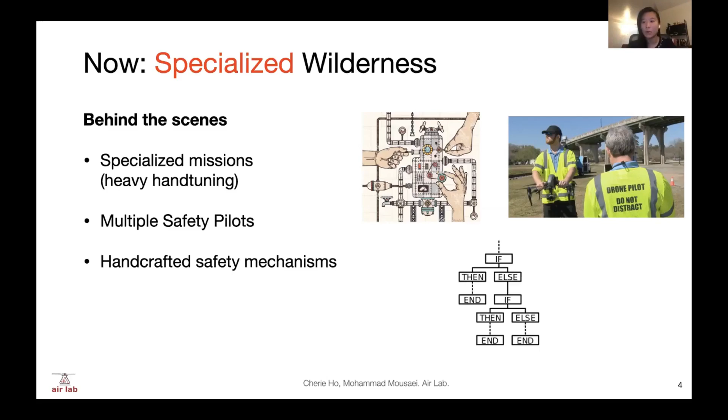So how do we get from here to our vision of ubiquitous autonomy? What we mean here is we envision a world where autonomy is seamlessly integrated into our lives at scale. And in order to allow for that, we first need to address the generalizability of our algorithms and rely less on the hand tuning that is needed, be able to handle out of norm cases and be self-accountable. So being able to handle these out of norm cases without necessitating the safety pilots.

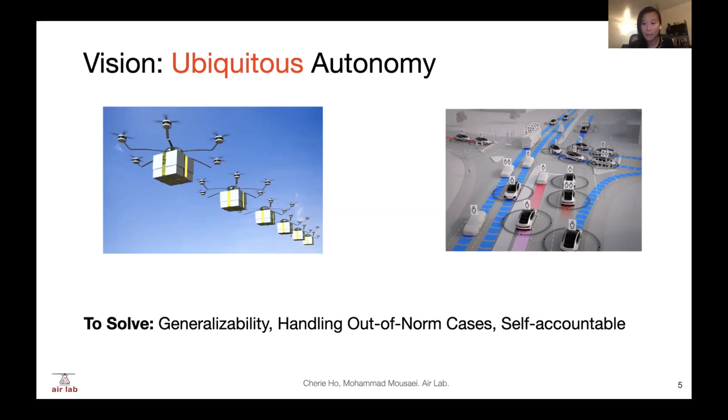So graphically, looking at the timeline and the level of risk, beforehand we were at very controlled environments, indoor environments, cages, where we're able to begin our robotics algorithms. And now we have a lot of success in bringing these caged algorithms out into the wild. However, this requires a lot of hand tuning and handcrafted safety mechanisms in order to enable safety for those specialized cases. Looking forward, we hope to go towards ubiquitous autonomy, where there's a lot higher risk due to the large number of cases that the system might interact with.

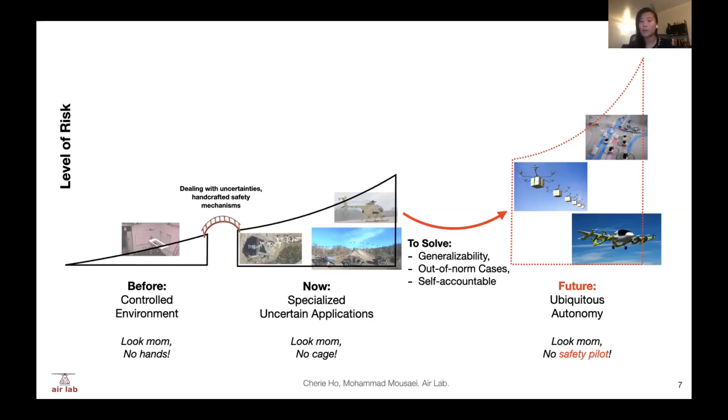And so really, to bridge this gap, we need to solve the generalizability issue, handling out of norm cases while being self-accountable. So to encapsulate, our key question is how can we ensure safety or guarantee safety for scalable deployment in the real world? What we mean by ensure safety is almost like ensuring there's a bound on risk, being the likelihood of a very bad, unrecoverable event, and bounding that in order for us to be able to have scalable autonomy.

So now we're going to talk about the challenges that ensuring safety has in current methods. We're going to look at a familiar running example that Basti introduced in his slides, which is the autonomous helicopter example. Here, we're going to add different agents, which are our dynamic obstacles. The helicopter has nonlinear dynamics, and it can experience different disturbances, like, for example, wind disturbance. And the goal here is to reach the goal point safely and without any collision.

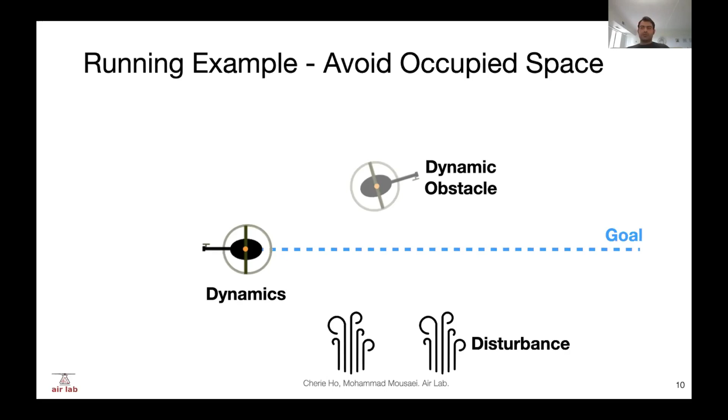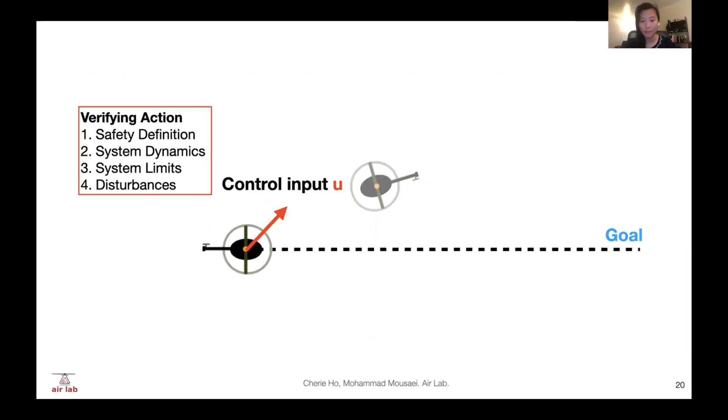So given an action can be a control input to the system or a trajectory to follow. If all cases are safe based on this definition, all cases being the bottom 3 blocks, then this action is verified as being safe. So to be more concrete about that, we go back into our running example. For example, an action can be a control input, or for now, we'll talk about a trajectory.

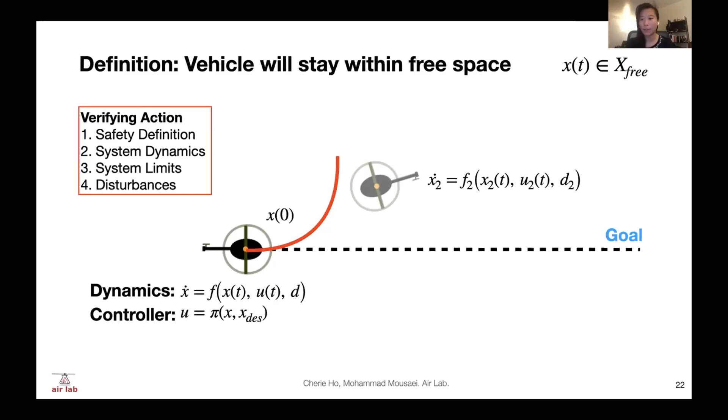We first define a safety definition. So a vehicle will stay within free space. We define the system dynamics, which includes the dynamics in the controller, and for the multi-agent case, maybe our knowledge of the other dynamics. And then we also have system limits, which goes under the controller on what the constraints are. And then finally, we have a disturbance, and this is often in the form of bounded disturbances.

I'll just wait right now if there's any questions from this slide and the slides before.

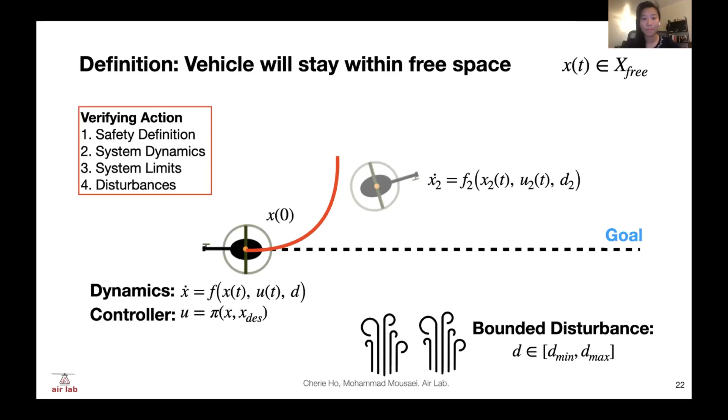Okay, so continuing on, we'll introduce 2 key tools, one being reachable sets and the second being control barrier functions. So the key idea of a reachable set is, here we focus on verifying that a trajectory will be safe. We'll be computing the set of all possible states when following the trajectory. We verify that an action or the trajectory is safe by ensuring that the obstacles are outside of this reachable set.

So mathematically, we can formulate this as a reachable set for a given time interval that it takes to follow a trajectory. And then this is a union of all the reachable sets at the different times while following. And then specifically, in the colored section, we can see how it's actually defined, where we look at all possible states given a model dynamics following our given possible initial states, the input, which comes from the controller and its constraints, and then the disturbance. From here, you can see how our assumptions on the model, the initial states, the input space, and the disturbance are vital to a safety guarantee.

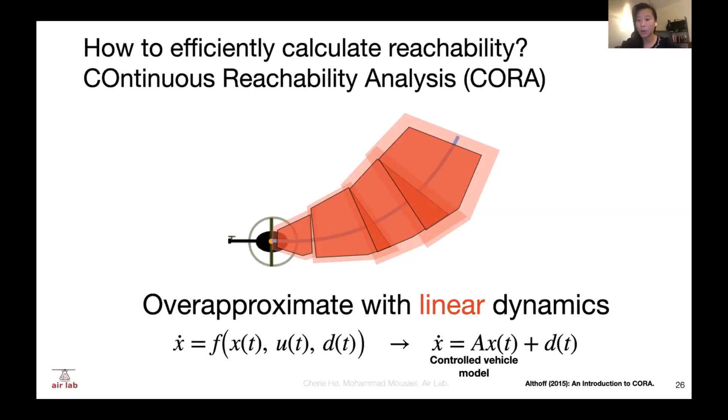So the key idea is we have a helicopter that has a nonlinear dynamic. The key idea is to first find the reachable set given a linear dynamics, and then over-approximate given the possible linearization errors. So mathematically, how the model has changed. First, to the left bottom here, we have x dot = f(x, u, d). That can be a nonlinear dynamics. They concatenate the controller and the vehicle dynamics into one, which is described by A, and then plus the disturbances and the noise as a separate d(t).

So building an intuition on why we should start with an LTI system. Here again, we have our model Ax plus d(t). The key property that we leverage is superposition, which allows us to separate the homogeneous and the inhomogeneous solution. What this means is the solution, being where this robot can be at time T, can be separated from where the robot can be given the disturbances. And because these are not intertwined, that makes the computation more efficient.

It's also helpful that LTI systems are a very popular system that we analyze across different engineering and physics disciplines. And so there are many well-known solutions we can use in order to aid in our solution finding.

So an overview of how we can calculate these reachable sets. First, I'll talk about how to calculate it for a linear system. Then we'll talk about the modifications needed to analyze a nonlinear system for our helicopter.

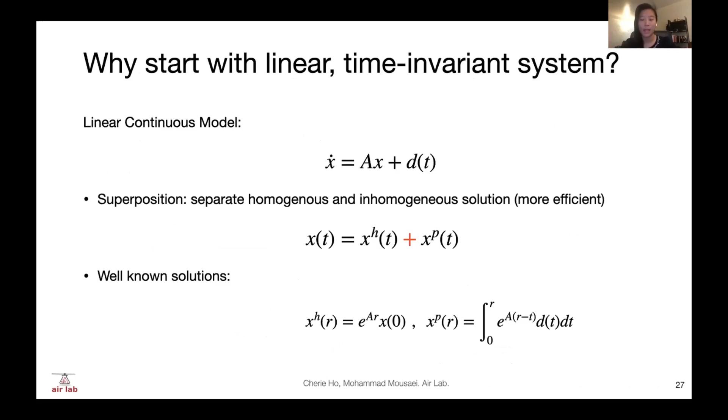However, just doing this convex hull is only a reachable set if the robot travels straight and has no uncertainties, uncertainties being disturbances or sensor noises. So in order to find the final reachable set for the interval, we enlarge the reachable set to account for the curved trajectory and the uncertain inputs.

So extending to nonlinear systems, once again, the key idea is to linearize the nonlinear dynamics, then over-approximate by the linearization error. We do this in order to enable efficient computation. Then we over-approximate by a bound that we can derive from the differential equation of the linearization error.

And then finally, for a highly nonlinear system, the linearization error can be extremely large. So we attempt to constrain it by defining a hand-tuned heuristic, which is the maximum allowed linearization error, such that if a set with linearization error bounds is larger than that, we actually split the reachable set and redo that calculation to be more accurate. Of course, this is a balance between how accurate we want to be and the compute time, as these loops would take multiples of time.

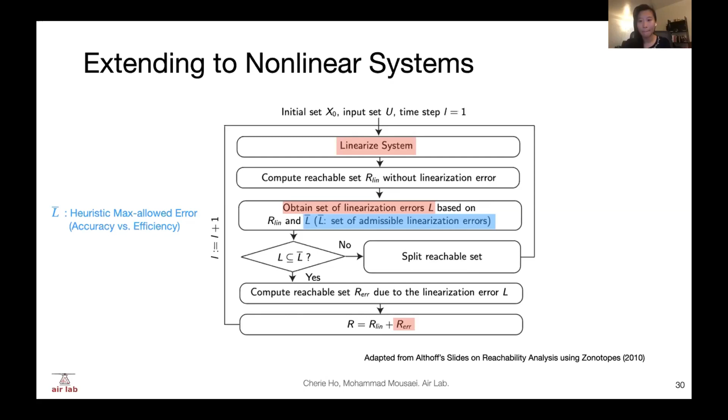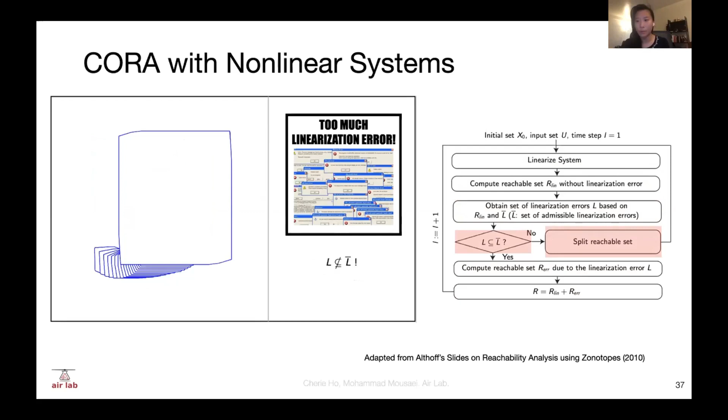However, in the very nonlinear cases where there's too much linearization error, in order to be more accurate, we split the reachable set. A note: in Althoff's paper where he applied this technique to the autonomous driving case, if a trajectory is outside of the maximum linearization error, he chooses to cast this trajectory as unsafe, as doing the splitting can lead to non-deterministic computation time, which is detrimental for our real-time constraints.

An extension of this work, also by Matthias Althoff, is on stochastic reachability analysis, which he also applied to the autonomous driving case, which may make more sense as it is highly uncertain where other agents may go. So he has done some work on how to account for the stochasticity.

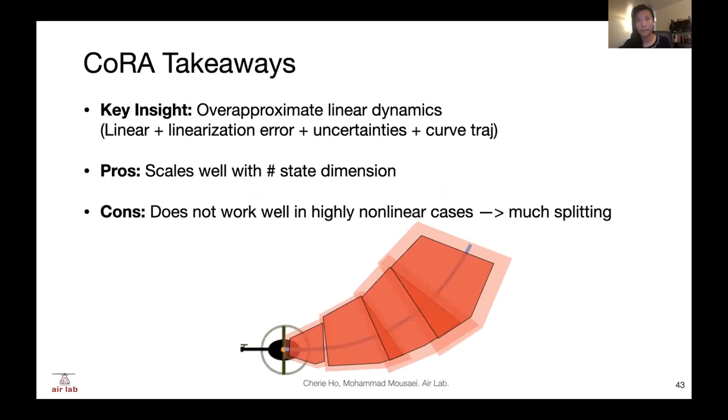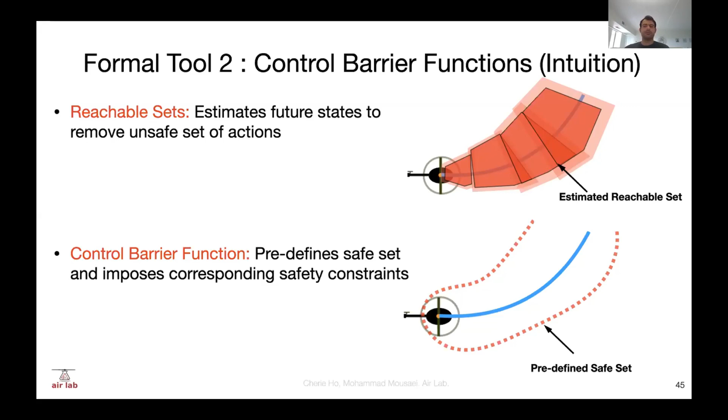So as we talked about, a control barrier function tries to predefine a safe set. And here we go a little bit deeper into how it's actually done mathematically. Here we assume control affine form, but in terms of the dynamics themselves, in the general form of control barrier function, we don't really assume anything. So we can plug in any nonlinear and complex dynamics here and still go through the same definition of safe set.

For the safe set itself, the safe set is the set C, which incorporates all safe states. The way that we define the safe set is that we first define the function h, which maps from n-dimensional state space into one value, which basically compresses the notion of safety, in the way that we define that whenever h is positive, we are in the safe set. So h being positive means that we are safe.

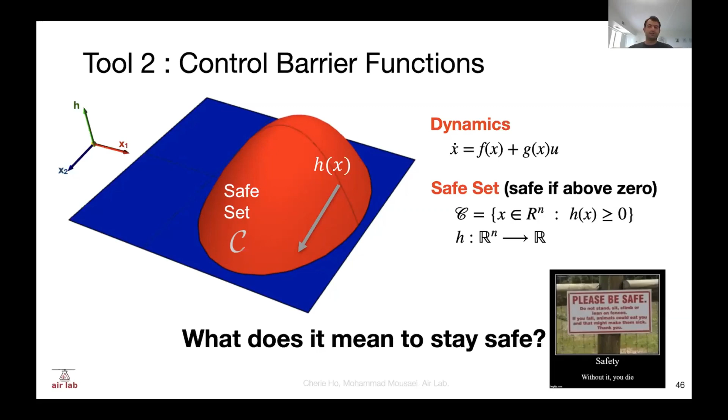So to show that visually, in the simple example of a two-dimensional state space, we can plot all the h values, and we can see the plot on the left. As you can see, the blue plane is basically our two-dimensional state space at h equals 0. Anything above this plane would construct our safe set, which is shown as the red bowl-shaped surface. So being safe basically means our system keeps being inside that bowl and doesn't go outside it.

Now that we have the notion of our safe set, how can we check for safety? For example, if we want to take an action, how can we check that that action is actually safe? You can assume that if we don't have any control input, which means u equals 0, we are confined on the surface of the safe set. So assume that we are at some point on the surface, we want to take some action, and we want to ensure that that action is safe.

One thing we can do is require the derivative of h to be greater than or equal to 0, which means we can only go further inside the bowl or stay at the same level of h, which basically ensures our safety. That is the notion of the Nagumo theorem, which says the derivative of h should always be greater than or equal to 0 on the surface of the safe set if we don't have any control input. So to make it more general, as an extension, we have the control barrier function, which allows our control input to be non-zero.

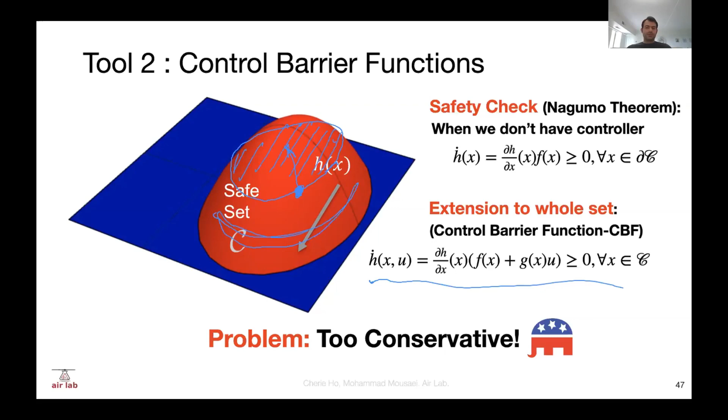One problem with this notion of control barrier function is that it's too conservative, which means that looking back to this point that we are in right now, if we want to abide by this constraint, the only area that is left for us to stay in is this top area. And we are losing this whole part, which is still perfectly safe, but we are not using it. So this notion of control barrier function is too conservative.

As a solution to being too conservative, we can allow our derivative to go negative. But we should be careful with that, because if our derivative goes too negative, we can go outside the bowl and we are no longer safe. So one way we can do it is through this equation 1 here, which basically allows our derivative to go negative.

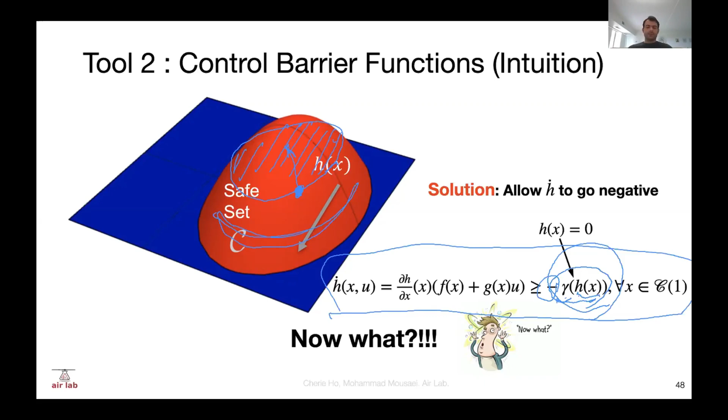So with this notion of safety, we can guarantee that we are always inside the safe set, and we can use the whole volume, but we can never go outside. So now that we have a mathematical framework to define safety, what can we do with that?

So what we can do with that mathematical framework of safety is that we can define a safety filter which lies between the controller and our system. And it basically filters the output of the controller. So the controller comes up with a desired control input, and this safety filter forms an optimization problem, which you can see here, that optimizes our control input to abide by the safety restrictions, but be the closest control input that can be to our desired control input.

So if our U desired is already in the safe set, this optimization problem just outputs the U desired itself. But if U desired is not in the safe set, it'll change it, and it outputs the closest U to U desired that is still in the safe set.

So this whole safety filter is computationally efficient because the cool thing about it is that our constraint is in affine form, and our objective is quadratic, which forms a quadratic program which can be efficiently solved through so many QP solvers that are out there.

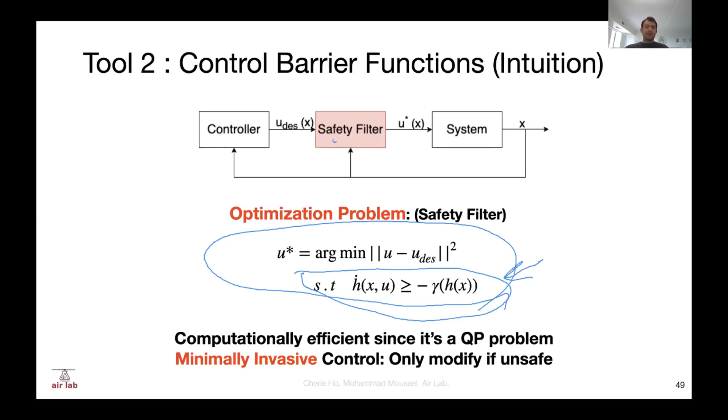And another good thing about it is that it is minimally invasive, which means that it only kicks in when the controller is outputting unsafe control input. Other than that, it just passes the same thing through.

Now that we have our optimization problem, we will talk about a specific example of how that safe set is being constructed, basically. So here we assume double integrator for our dynamics. And for defining our safe set, we basically need our velocity-based distance between two robots to be greater than a safety distance. More specifically, we want their distance plus the distance that they would travel in a certain time to be greater than a safety distance.

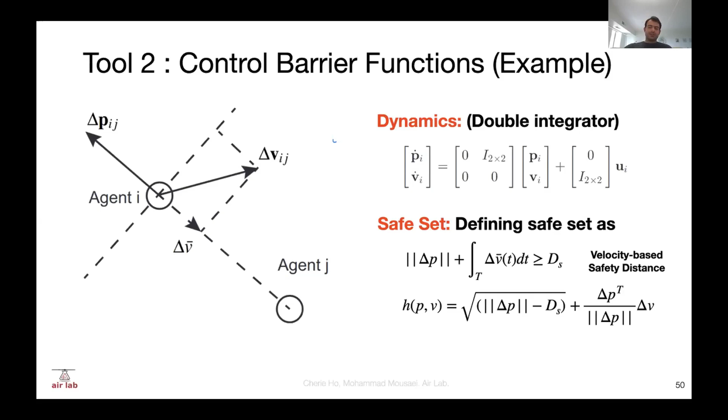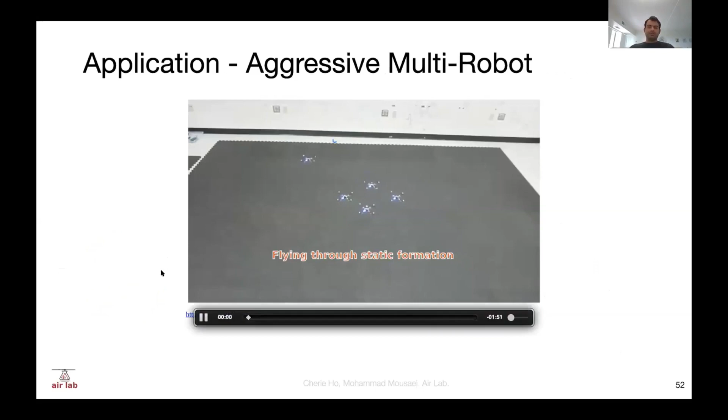So the best way to show the result of control barrier function is through aggressive multi-robot application. And you can see here that the 4 robots in the middle, their controller is trying to either hold a position in hovering mode or go in a circular motion, which you will see later. And the other robot is trying to go through them, basically. And once they are in collision course, control barrier function kicks in and changes the control input for the robots to stay safe.

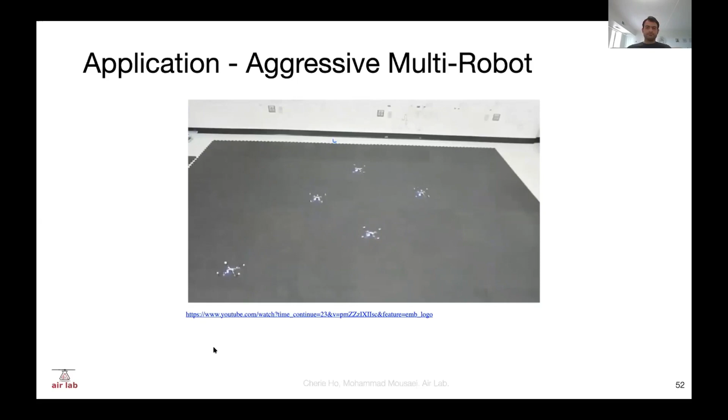So the main takeaways from control barrier functions: the key insight is that a control barrier function predefines the safe set and tries to always stay in the safe set, assuming that all the assumptions still hold. And implementing control barrier functions is minimally invasive, which means that it only modifies the nominal control if it's

absolutely necessary. The good thing about control barrier functions is that they are used to verify safety properties of a set without going through the difficult and computationally expensive task of computing the reachable sets, which Cherie talked about. So it's computationally more affordable.

But the disadvantage of control barrier functions is that they basically don't really work when our assumptions are violated. And they can get stuck in a deadlock situation when the system is completely symmetrical. Also, this is not exactly a disadvantage, but it makes control barrier functions a little bit case specific: for any application, we need to design our custom safe set, and it reduces the modularity of it, kind of.

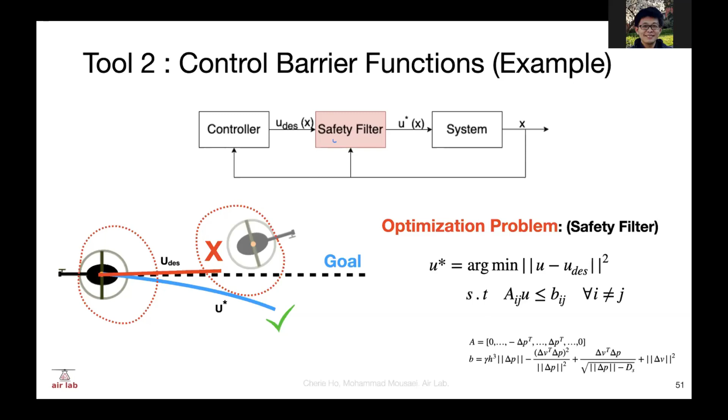Okay, thank you. Any other questions? Okay, so back to Cherie.

All right, thanks, Mohammad. So just now we talked about the mathematical formulations needed to verify an action, either a trajectory or a control input that Mohammad talked about. Let's see what some challenges are where this might fail, and we'll also talk about one key way people are beginning to address this. So back to our key figure, where we're going from specialized cases into ubiquitous autonomy, the real world, where we don't really know the potential cases our system can face. So at this point, are our current tools sufficient?

So comparing the common model and the real world, going back to our key ingredients like dynamics and disturbance, these are just a few examples, we can see deviations between our common abstracted model and the real world. For example, in vehicle dynamics, we generally abstract it as an integrator model, often second order, which means it's an acceleration-based model. However, in the real world, these can be highly nonlinear with a lot of dynamic constraints.

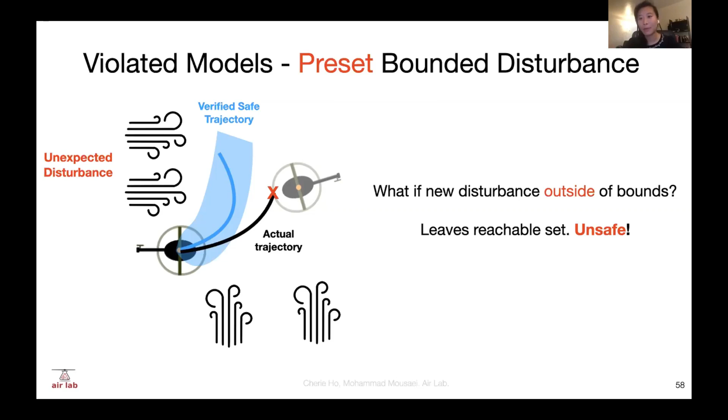not in collision. However, suddenly we actually experience disturbance outside of the bound, so we have 2 more winds coming from the left side. This can cause the actual trajectory that the helicopter experiences to leave the previously verified reachable set, and therefore it's actually unsafe. So here, our model assumption is violated when the disturbance is outside of the assumption.

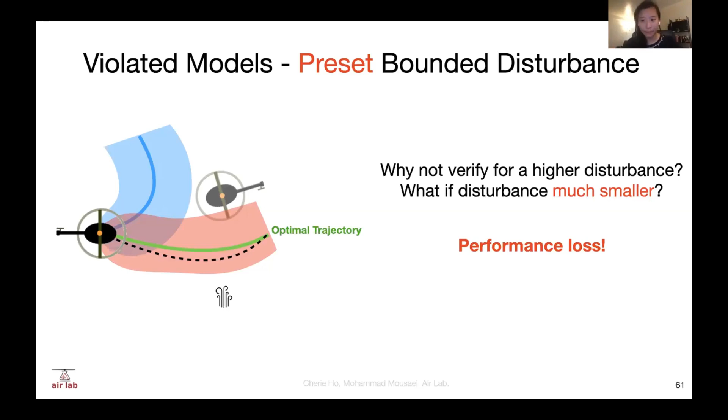So one option that people are starting to look at is adapting this kind of safety verification online based on the current estimation. One way that we have proposed doing this is pre-computing these reachable sets at multiple disturbances, basically at multiple disturbance models. And then online, using the disturbance information to adapt our margins on the fly. So going back to the running example, how this can be used. We also do this in a trajectory library framework.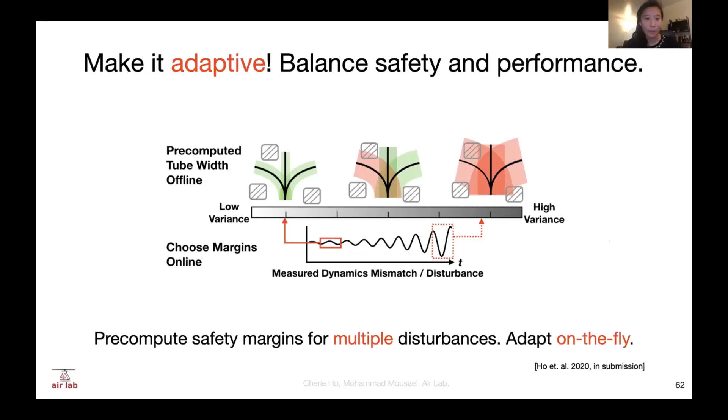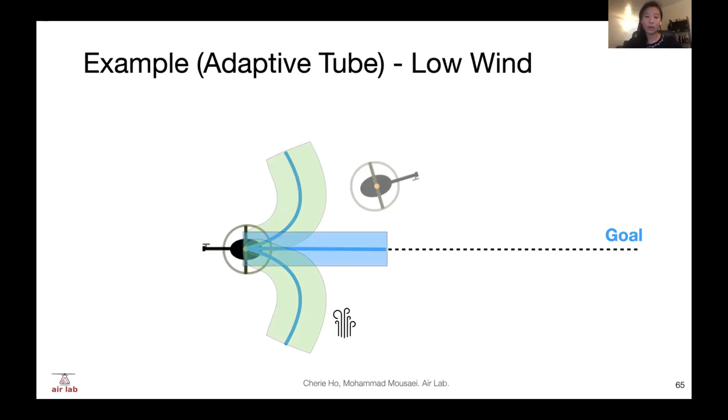Here, again, with our running example, we have 3 trajectories that we can choose from. It senses that it's at low wind and uses the smaller reachable sets. And all of these are verified safe. And we finally choose the straight line path, which goes straight to the goal. And at high wind, the original trajectory that we chose in the low wind condition is in collision, and we choose one of the left or the right turn. So here we adapt in order to better balance safety and performance while giving safety guarantees.

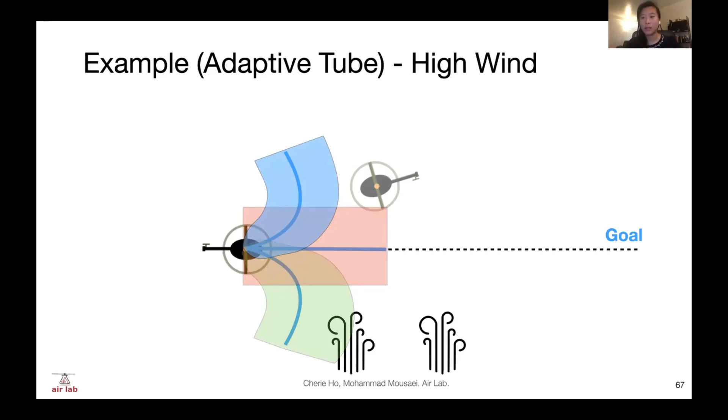So in summary, we talked about why ensuring safety is important. The underlying challenge is safety versus performance, which is exacerbated by the increasing complexity of our algorithms and the number of tail-end cases in more and more applications that we're going into. We also talked about 2 key formal verification tools: reachability analysis, which, as Mohammad says, estimates the possible states that a system can be in given a certain action, whilst with the control barrier function, we predefine what the dynamics should look like in order to give a guarantee on where the barriers of the system are. And we talked about how this may fail when the model is deviated and potential methods to alleviate this challenge.

Some of the open questions and trends: how do we know how well we have covered these cases for complex systems? As Mohammad talked about just now, these complex systems may now have neural networks, a lot of learning-based systems, where it's very unclear how we can actually test for coverage. Second, how can we still stay safe even when our previous assumptions are violated? One potential way we talked about is having multiple assumptions and then adapting which assumption to choose in order to get that verification.

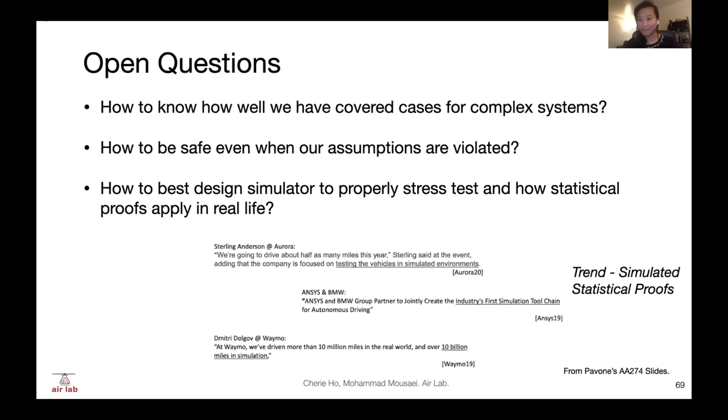Cool. So we'll go on to our interactive session that Mohammad will lead. In the interactive session, we're gonna go through control barrier functions that we just introduced. You're gonna implement that safety filter, which lies between the controller and our system itself. So the way you do it is that you are provided with the nominal U, and you are trying to construct that optimization problem that comes up with the U star.

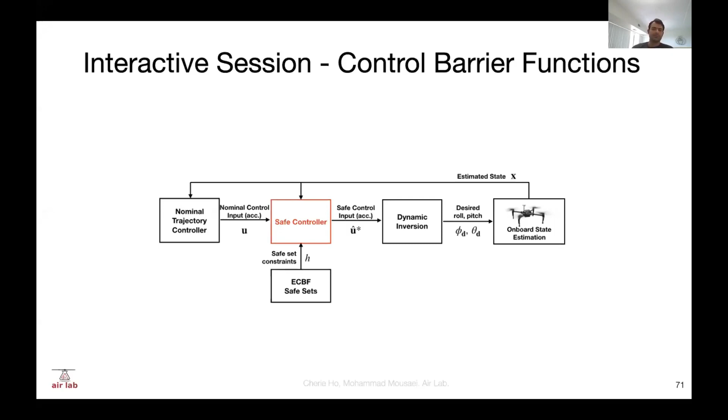So what you want to do is to fill out the compute safe control function in ecbf_control.py to implement the control barrier function optimization problem that we introduced today. A and B is actually already in the code, but you can use compute A and compute B functions to derive the constraint, and then you want to construct the optimization problem. And can we go to the next slide?

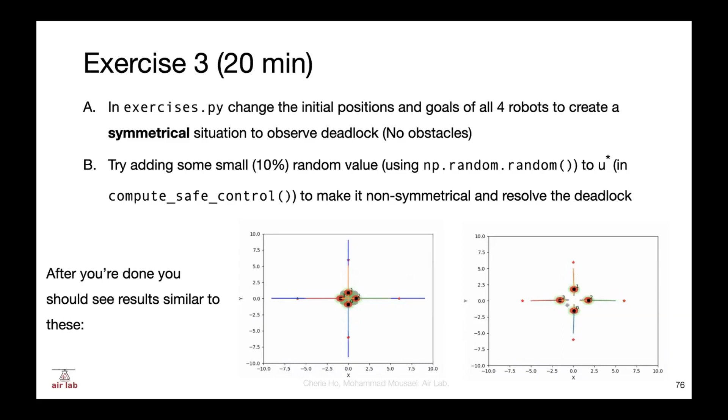So here, we're actually going to recreate one of the classic scenarios that Mohammad talked about, which is deadlock. In order to do this, you'll need to change the initial positions and goals of all 4 robots. So basically you need to create a completely symmetrical case where the deadlock happens. And after you get the deadlock, as a kind of hacky solution, try to add some random value to our optimized U to get it out of the symmetrical situation and resolve the deadlock. The animation on the left is the deadlock situation, and on the right is with noise resolving it.